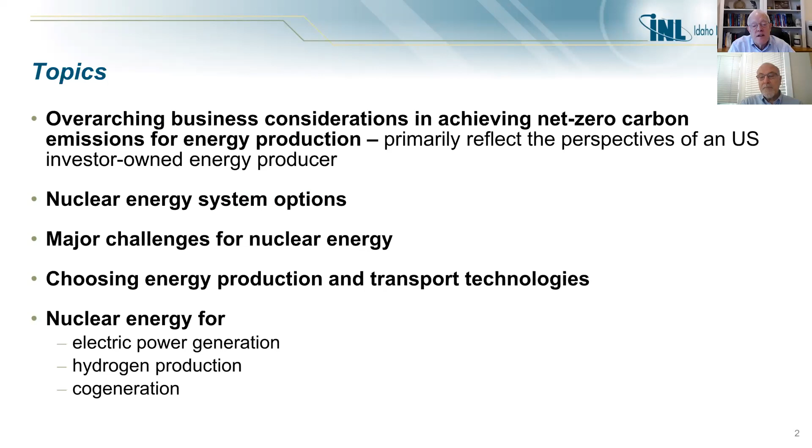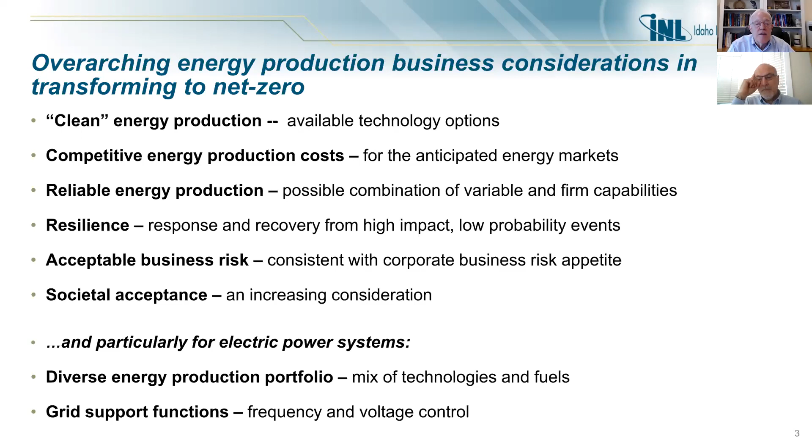Now, this is a list, and I won't read it to you. This is a list of some overarching energy production business considerations in transforming to net zero. I'll focus on a handful of these. One, looking at competitive energy production costs. Two, reliable energy production. How do we get to an acceptable business risk from the perspective of an energy producer? And then lastly, for electric power systems specifically, what are the thought processes in getting to a diverse energy production portfolio? This is clearly a discussion of not just nuclear energy, but what is the mix that makes sense? Next slide, please.

In terms of nuclear energy system options, fission reactors in particular, there's a broad array, more than you can shake a stick at, that currently exist out there in the industry. And they won't all survive. That's just part of the business of finally down selecting to what makes the most sense from a business standpoint.

And understand, I am approaching this from a business perspective, not from a technology perspective, because the companies, particularly investor-owned companies in the United States, look at technologies, hopefully to the extent they can on a level playing field, and make their decisions based on business decisions. Technology is not the driving thought process.

So what are the options? There are a broad range of options available. The existing large light water reactors and heavy water reactor designs in Canada that have been deployed. The evolutionary light water based small modular reactor concepts, which are being looked at very closely both in the United States and in Canada today. And some alternative reactor coolant, non-water-cooled small modular reactors, and some larger reactors as well.

Now, these evolutionary and non-LWR technologies are interesting. They're not all new thoughts. Many of these we've looked at over the years, as far back as the 50s. These are variations on the theme that were looked at in the past, with a great number of improvements associated with them. So, some characteristics that are important. One, there's a higher operating temperature available in most of these designs to support industrial process heat applications. Very important option as an alternative business application.

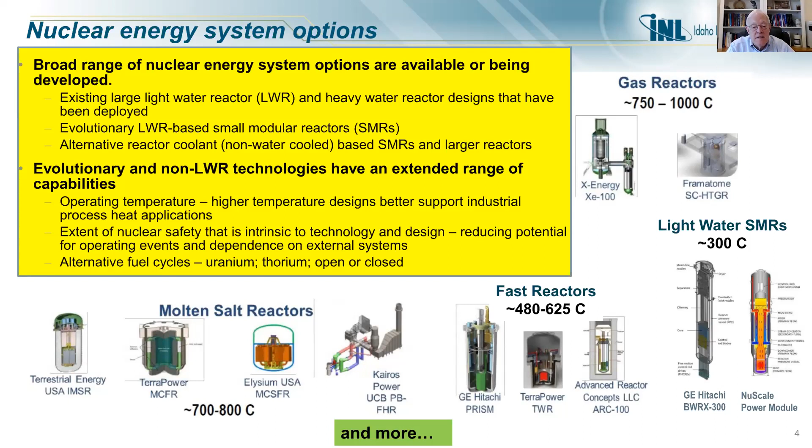Now, if I look at the United States, and I'll focus there because that's where most of my experience is, nuclear energy development in the United States today is very broadly based, not focused on bringing any particular concept to commercialization today. We're looking at multiple different options.

Our major US electric power producers are committed to decarbonization. These are the folks that have been the owner operators for nuclear energy systems in the past. But that is a work in progress. The role of nuclear energy is yet a work in progress. The planning is yet to be finished, if you will, or even hardly started in many cases. And what is the role of nuclear energy?

In major part, it's waiting on the policies of the United States government as to where we're going with our net zero carbon emissions policy. What is it going to be? What's going to be the structure that will be enshrined presumably in legislation in our Congress? And what's the timing for that? You may have seen in the public media that the current administration is pushing towards a 2035 date for achieving net zero in the electric power industry, whereas the power industry has been looking at 2050 in general.

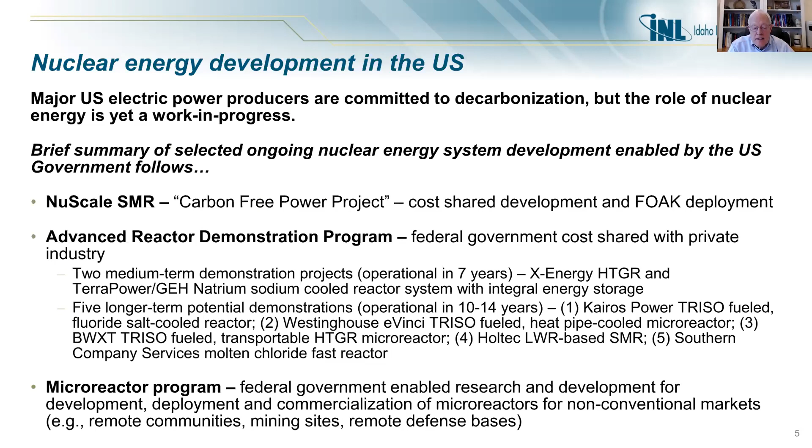Now, what are the major challenges for nuclear energy? One is, and probably the most difficult one right now, is demonstrated economic viability. We've had a number of false starts over the decades in terms of achieving economic viability of nuclear energy.

Our recent experience with the Plant Vogtle Units 3 and 4 in the state of Georgia got off to a bad start. It's an example of how not to build a nuclear plant. They began construction well before the design was done. And they've run into a number of problems over the life, and they'll finally be operational over the next couple of years, but a real challenge, and hence not a good demonstration of economic viability for a large so-called stick-built light water reactor.

Now, the small modular reactors have the potential for lesser capital investment due to factory modular construction compared to the economy of scale of the large light water reactors or other technologies. It doesn't have to be an LWR, but that's not yet demonstrated. And I hope we're able to show that that comes true. However, it's not demonstrated at the present moment.

Also, from a standpoint of economic viability, is the grid compatibility. The large LWRs require a large compatible grid. It's not something you'll put in a small isolated grid or in a remote location. SMRs, small modular reactors, can fit better in the smaller and variable size grids. Hence, there's an advantage, particularly when we're dealing with isolated grids or small grids.

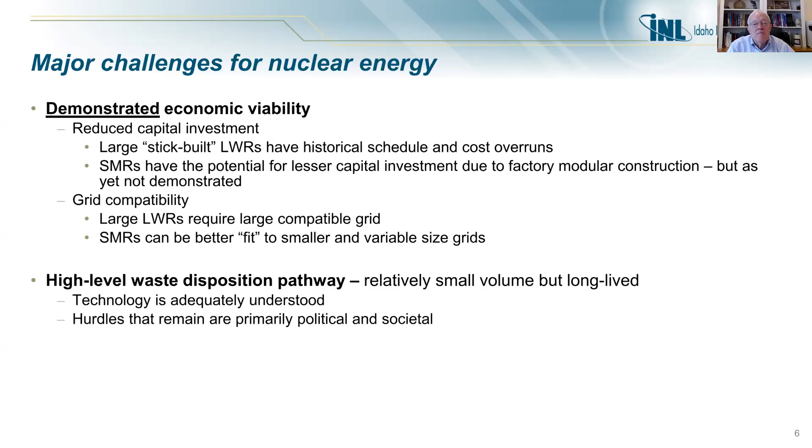Now let's talk a little bit about choosing energy production and transport technologies. And again, I'm doing this from a business perspective. I'm sitting back and saying, as I look at options, what's the best one that fits my business model and the approaches and the business lines that I have? So what's the expected energy utilization? Which lines of business do I want to be in? Historically, US utilities and power generating companies have been in the electric power business. That's what they do with nuclear energy.

However, there are opportunities opening in the areas of hydrogen production, the potential for process heat for industry, such as was mentioned by Sohail for the oil sands. And there's a hybrid energy production utilization where we look more broadly at the combination of electric power generation and process heat production in combination with a number of different off-takers and build a business model under the case of multiple off-takers.

So questions like, what is the proximity of energy production to where energy is used? As I'll discuss in a few moments about the oil sands, we're talking about kilometers between where the energy source may be and where it's utilized. How do we move it? How do we transport that energy? Electrical transport is one way to do it. However, that brings some inefficiency problems. Steam is another, molten salts. So how do we move it from where we generate or produce the energy to where we want to utilize it? A different question than we have faced in the past when it's been electric power generation as our sole business.

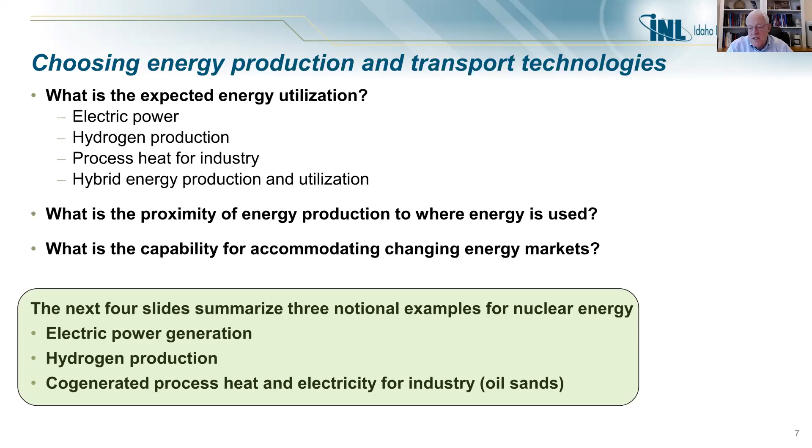So let's look at diverse production mixes for electric power generation. What's the optimal mix? There have been many regional and system level studies that are done. I mean, you can go to your bookshelf or online and find a large number of them. They all come to the same basic set of conclusions, that the optimal mix is a function of legacy and anticipated future resource options, no surprise.

A cost-effective, reliable, and decarbonized grid requires firm capacity, the old terminology, base load. There needs to be a considerable amount of firm capacity. A broad range of technologies, and I'm not speaking here just of nuclear, but a broad range of production technologies lowers the cost and business risk, and I'll discuss that in a moment.

Power producer considerations. Now I've gone from energy producer to power producer here because we're looking at electric power generation. The ones most often missing in these studies are the things listed there. How do we deal with stranded assets? What are the business lines of interest to the power producer? What's the corporate appetite for risk? And that's probably the one that overwhelms all the rest. How much risk are the power producers willing to take? Are they willing, as the expression I often use, to bet the farm?

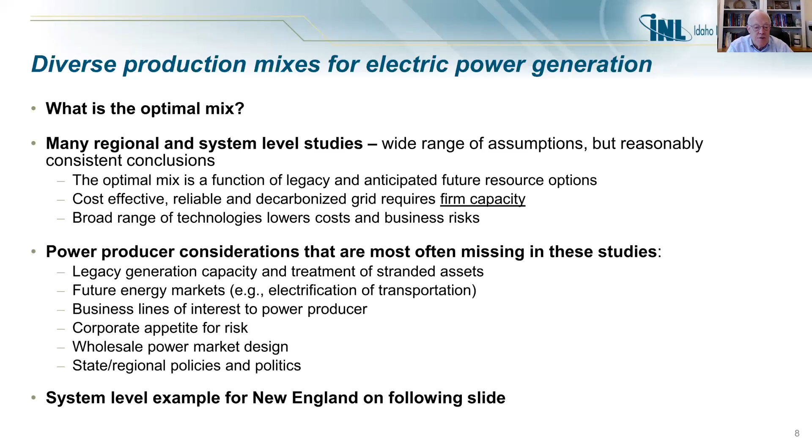On the next slide is an example for New England. This is out of a study done by MIT, the Future of Nuclear Energy in a Carbon Constrained World, and I offer that you may want to look at that directly. The figures may be difficult to see on these slides. But what's the bottom line? If you try to do it with singular technologies, or what is currently popular in New England, which is where I live, is, gee, we want to do it all with renewables, that drives the costs way up. The issue is there's a better balance.

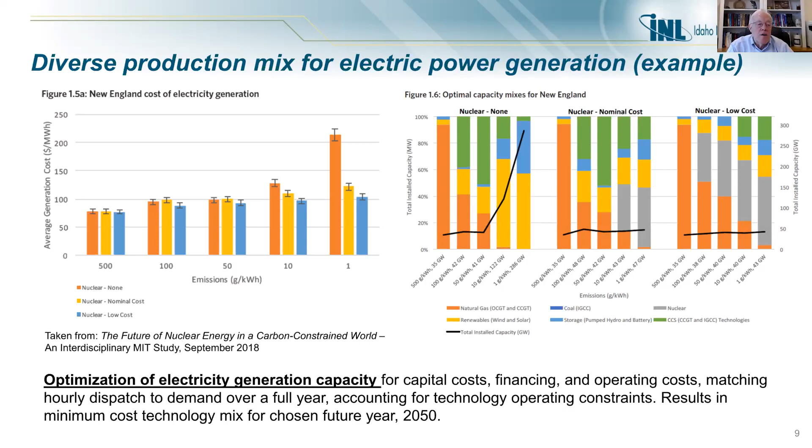What this study did was open the door and ask, what are the possible options as we decarbonize where we should combine different technologies for generation and production of energy? What seems to be the best mix? And what kept coming up, and this shows it for New England, but the same is true in Texas and other places the study looked, is that nuclear energy is a very important contributor to successful net zero emissions. As you increase your decarbonization, nuclear energy plays a larger and larger role to achieve best overall costs for production of energy. Next figure, please.

That business case won't carry you forward into the future, where you're having to build new infrastructure, in particular nuclear infrastructure, where over 70% of the initial capital investment and eventual production costs are that capital investment. I'll repeat that, over 70% of the production costs of a nuclear facility are tied up in the capital investment. So it's very important that we look for ways to get to higher efficiency nuclear produced hydrogen, for instance, high temperature steam electrolysis and some thermochemical cycles. Next slide, please.

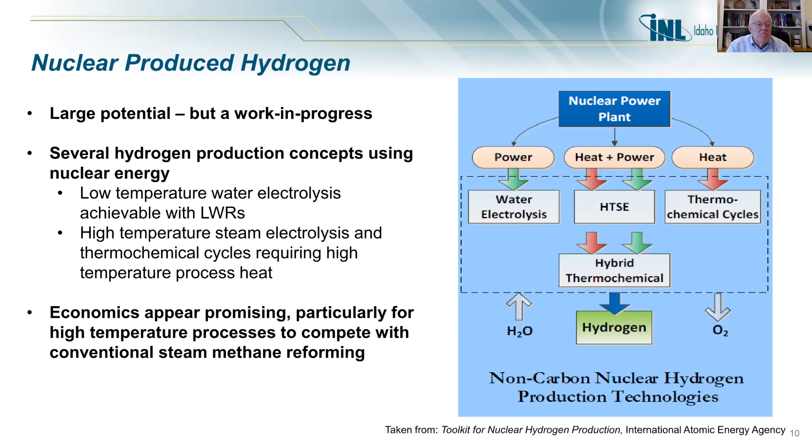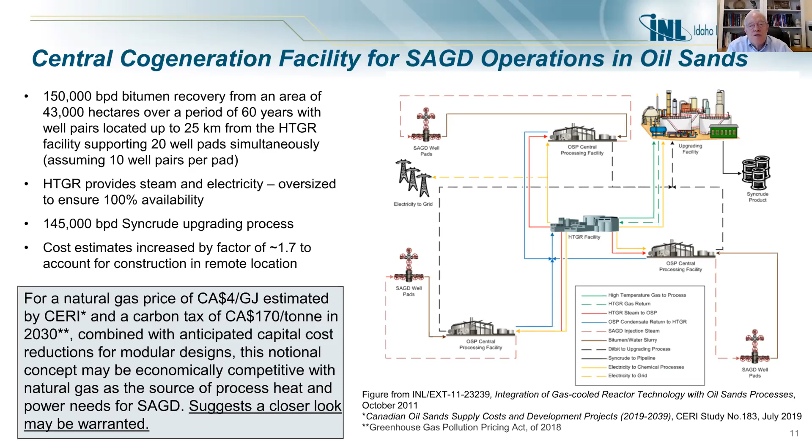And I'm suggesting here that Sohail and others may want to return to this discussion again with the projections for the carbon tax and what advantages we may get out of small modular reactor designs over time. That could say this might be an economic choice that we should look at very seriously again. Let me go to the conclusions, please. Next slide.

Nuclear energy does provide a compelling option for clean, economic, reliable energy production. And there are multiple potential applications that range from electric power generation to process heat production for industry. We have a lot of choices. Water-cooled and moderated reactor technology, some of which are applied in the small modular reactors, have extensive good operating experience, over 19,000 reactor years.

The accidents and events that have occurred are not technology oriented. They're a result of design flaws and misoperation. And those of you who may be interested in talking about that in more detail, I would suggest a separate conversation, because folks tend to assign what occurred to a particular technology, and it's not. It should be assigned to the specifics of the design, where the flaws were, and how they were misoperated.

Emerging evolutionary and advanced systems offer the potential for reduced capital investment. Very important. And better matching of production capacity to the application. And I underline this next point very strongly. All nuclear energy technologies will fulfill the acceptable yardstick for nuclear safety imposed by the regulators, or they won't be licensed.

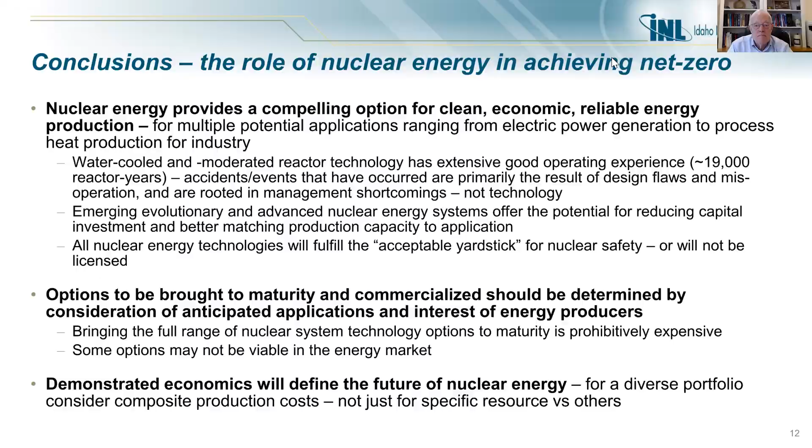Phil, that was an outstanding presentation, very thought-provoking and well-informed. So thank you very much. We appreciate that. The next presenter is Mr. Ali Siddiqui. Ali is the acting head of directorate for the Advanced Reactors Directorate at Canadian Nuclear Laboratories.

Ali has a range of management and leadership experience gained through roles including leading CNL's thermal hydraulic experiments and analysis group, corporate manager, supporting the executive team in the office of the CEO over the period spanning the AECL-CNL restructuring, and in program management roles with an essentially diverse range of research, including nuclear fuel and SMRs.

His current accountabilities as the acting head of directorate include leadership of over 150 scientists and technologists, management and oversight of a diverse set of advanced reactor related federal and commercial research projects, strategic planning, development of new S&T opportunities, and support for the SMR projects at CNL. So with that, please join me in welcoming Ali to make his presentation. Ali, you have the floor.

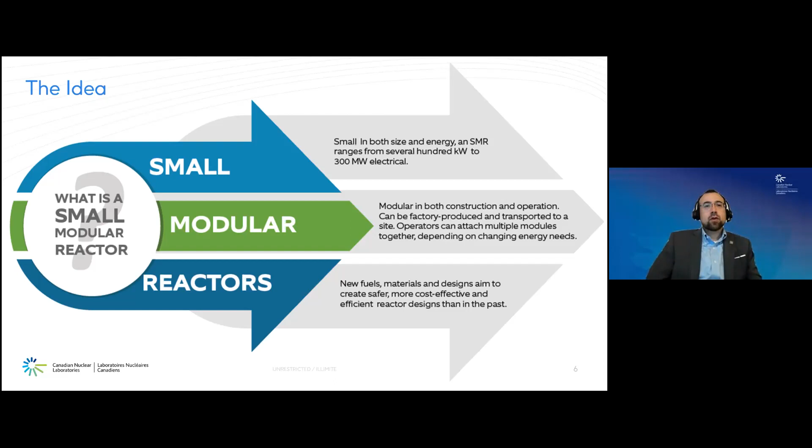SMRs really are an opportunity for Canada to decarbonize, and in particular, in areas which would be very difficult to decarbonize with other technologies. They really are the next great opportunity for Canada to reach net zero goals by 2050 and ensure economic growth and provide energy for all. Canada is in an excellent position with partners around the world to lead in SMR deployments. I would point to a couple of particular notable framework agreements or documents that came out in the last year, including Canada's climate change plan, Canada's hydrogen strategy, and Canada's SMR action plan, all of which lay out a future that includes nuclear and SMRs.

There are many markets for SMRs in Canada, and I'll talk a little bit more about that on the next slide, but certainly in sectors such as oil sands, in mining, in heavy industry, remote sites, and as a replacement for coal-fired generation, SMRs look quite promising. And they can be used to produce steam, process heat, electricity, and even be applied to produce hydrogen to use energy in the most efficient way possible.

I want to give you a little bit of a picture of the SMR landscape as it sits today. And I guess it's worth really highlighting here that in Canada, there really is a coordinated national effort. From a federal perspective, I've mentioned some of these framework documents, including the SMR action plan, where over 100 organizations have laid out something like 500 specific actions moving the SMR agenda forward. In the climate change plan, the Minister of Natural Resources specifically called out nuclear to help achieve 2050 zero emission goals by noting that there really is no credible climate change plan to reach 2050 targets that doesn't include nuclear. And I think that's really critical, and SMRs are an important part of that.

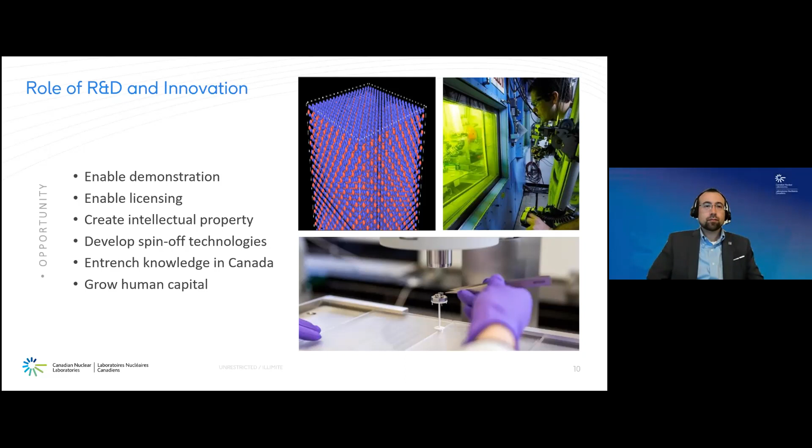We have several enabling components to help CNL achieve the vision that we've laid out to see SMRs come to fruition in Canada. Notable components here include our federal science and technology program, enabling us to build capabilities and support the federal family for science-informed regulation and to inform policymakers.

Canadian Nuclear Research Initiative, which is a cost-shared research program that enables SMR vendors to access CNL's capabilities in a collaborative approach. CEDIR Park, which is our clean energy demonstration, innovation, and research park. I'll talk more about that in a moment. And really critical is this SMR siting initiative that we have at CNL to see an SMR demonstrated on a CNL managed site by 2030. I'll give a few more comments on each of these before moving on.

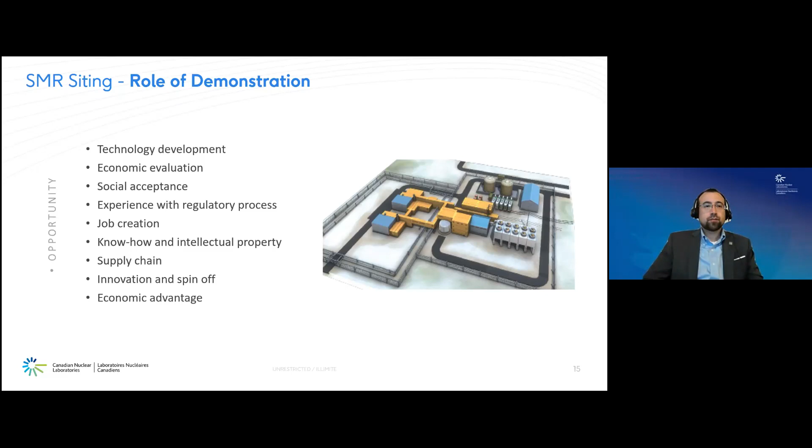CNL's demonstration timeline is moving forward quite rapidly. With the initial concept and a request for expressions of interest starting back in 2017, we launched an invitation process and first intake of applications in 2018. In this first intake, we received several applications. Throughout 2019, CNL furthered the development of potential sites and performed environmental baseline studies. We actually have multiple sites available at both our Chalk River Labs location and at a site that we have in Whiteshell, Manitoba, that may be suitable for SMRs to prove out their designs.

We have some first agreements in place, which is very exciting, which I'll talk about on the next slide, with one particular vendor that's moving forward rapidly within our process. And we're basically on the trajectory to demonstrate first power by 2030. So it's an exciting time.

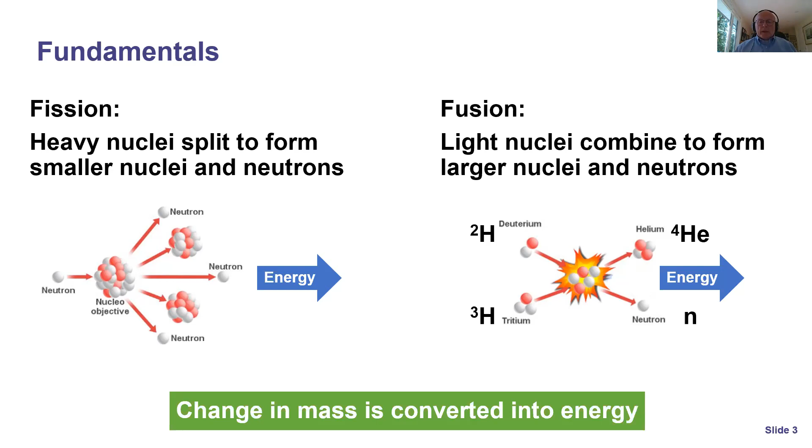An important point to note is that the products of nuclear fusion are not radioactive substances, although some radioactivity can be induced as a result of the neutrons being generated. But nuclear fusion has the inherent advantage of not creating long-lasting radioactive waste products. May I have the next slide, please?

And I think it's really important to recognize that fusion is a natural phenomenon. It's a phenomenon that powers the sun. It's the phenomenon that powers actually all of the stars, where nuclei are combined, mass is converted into energy, which is then manifesting itself in terms of electromagnetic radiation.

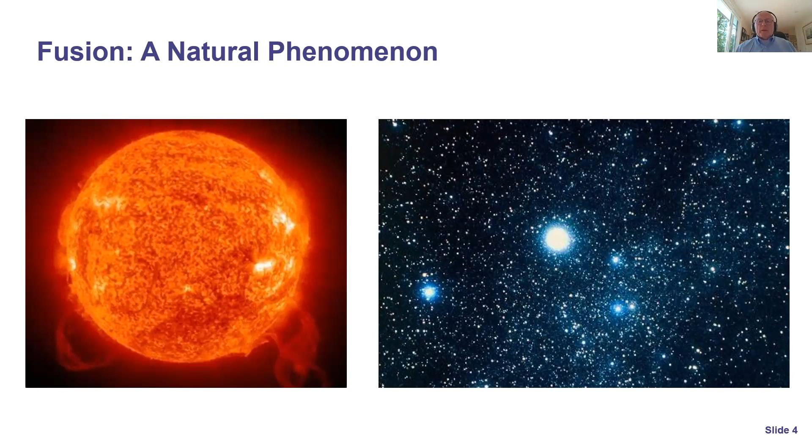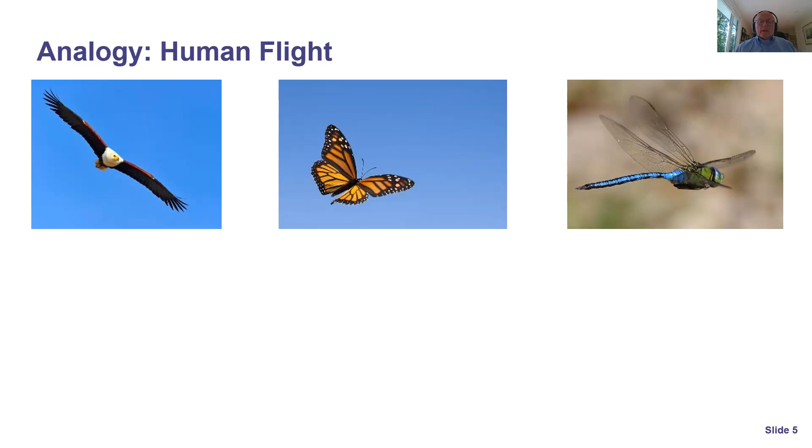But just because fusion is a natural phenomenon doesn't mean it is easily achieved under commercial conditions or for private use. So let me take a little diversion into an analogy. And the analogy is, in fact, human flight. Human beings have wanted to fly for a long time. They've known for a long time that flight is possible. After all, you can observe birds, butterflies, dragonflies. But that doesn't mean that it's easy for humans to fly.

If you click, since antiquity, there's the myth of Icarus who tried to fly by sticking feathers to his arms, and that didn't work. Leonardo da Vinci in the 1400s designed a flying machine with flapping wings, thereby emulating what birds do. Then there was an excursion into lighter than air flight, principally by the French in the 1700s.

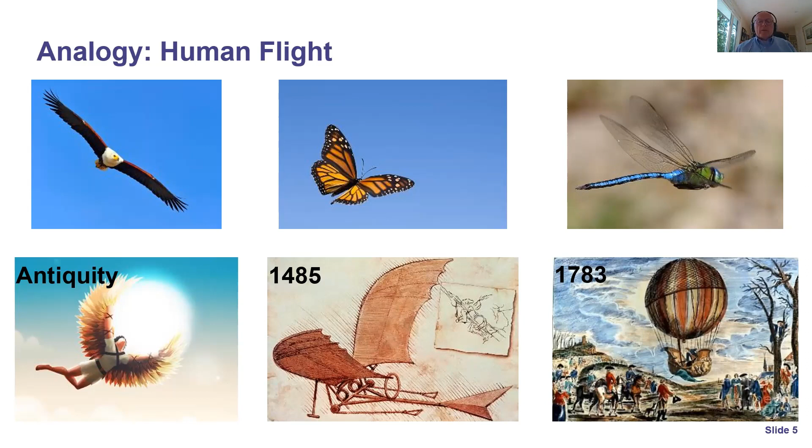But none of that really made human flight possible until the early parts of the last century, when the Wright brothers figured out that if you have the right combination of thrust that can produce lift, you can generate human flight. Their initial flight was extremely limited, no more than a few tens of meters, in fact.

But they recognized the importance of lift and thrust, and they recognized that you needed a power plant in order to generate the thrust, not by flapping wings, but by turning a propeller, having a power plant that was light enough and a fuel supply that carried enough energy in order to make flight possible. Well, you know what follows on from that, particularly during the two world wars, aircraft were developed to the point where we know them today.

If in 1903 you had asked the Wright brothers, is it going to be economically feasible to fly from the east coast of the United States to the west coast of the United States based on what they demonstrated in 1903, the answer would have been, the potential is there, but it's a long way between potential and reality.

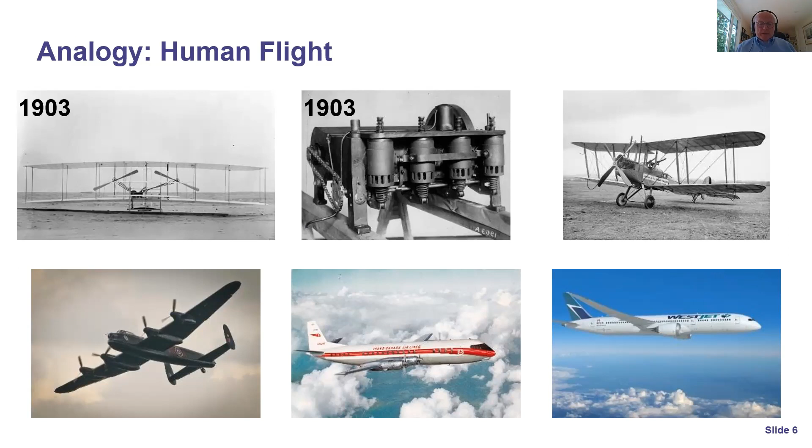So much for the analogy of human flight and fusion. Let's get back to fusion and what are the main approaches that are currently being used. The main approach that is receiving most of the attention is the combination of deuterium and tritium to form helium and a neutron. Now, deuterium exists in nature. It's part of water. We refer to it as heavy water. But tritium is not. So you actually have to produce tritium in order to make the fusion reaction work.

And you do this, or one way of doing this, is to take the neutron that's generated and you interact it with lithium, which makes more helium and tritium, which is what you're after. So the overall reaction is deuterium plus lithium forming helium plus energy.

Now, I know we have many members here today who are from the Society of Petroleum Engineers, and most of them do not think in terms of electron volts when it comes to energy, but they think in terms of other terms. So let me translate that. And let me translate it into a simple, but what I hope is a convincing way.

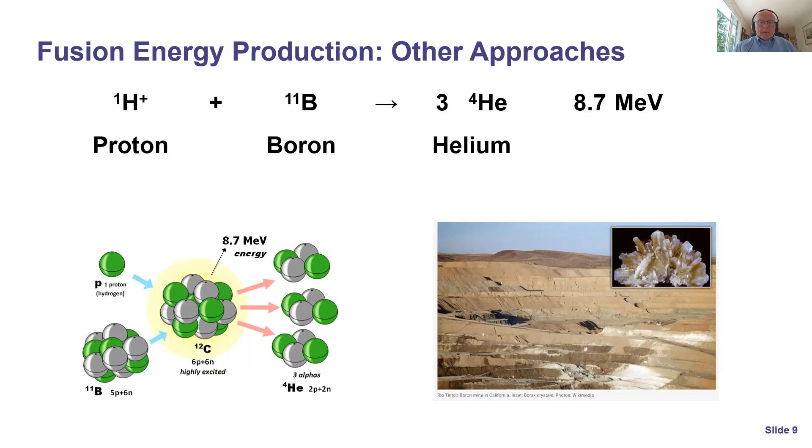But if you look at the energy that is yielded by this reaction, it's 8.7 million electron volts, as opposed to what I showed you on the previous slide. And on the left-hand side, you see the reactions of a proton with boron. It goes through carbon, and then it makes helium. And helium is an inert, non-radioactive product. So those are the fundamentals of fusion reactions. What are the challenges? May I have the next slide, please?

Well, there are some really big scientific and engineering challenges in fusion. And the reason is that nuclei, which are positively charged, are resisting their combination or their fusion due to Coulomb forces. Like electrical charges repel each other. So you have to find a way of overcoming that repulsion. So how is that done? How is it done in the sun, and how is it notionally done on Earth?

Well, you could do it by raising the temperature of the reagents to a very high level, like 100 million degrees Kelvin. And if you do that with deuterium and tritium, like any other reagent, it forms a plasma. That is, the electrons and the nuclei are no longer in close proximity, but they are separate. And at these high temperatures, they have a very high velocity.

And when particles have a very high velocity, and they are confined so that they don't escape from each other, and when they bump into each other, they can do this under conditions where the Coulomb forces are overcome. So you have to create very high temperatures of the level that occurs in the sun, and you have to confine your plasma for the nuclei to be able to collide or bump into each other. And when those conditions are right, then the nuclei can fuse, and we refer to it as a burning plasma.

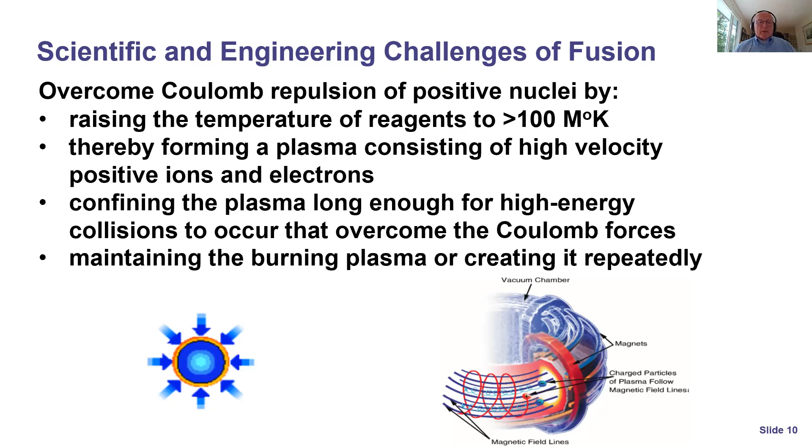So in the case of inertial confinement, you start out with a pellet, similar to a droplet in a diesel engine. And imagine that this little pellet, which may be a few millimeters in diameter, is irradiated by a large number of high power laser beams in every direction, in all three directions. If that happens, the high energy from the laser beams will cause the molecules that are on the surface of the pellet to heat up, evaporate, and by Newton's simple law of action and reaction, they will compress the remainder of the pellet.

And if it's done right, the compression will be such that the temperature will approach the 100 million degree range, and a burn will result, releasing heat, helium, and neutrons. And this very conceptually is the approach that's taken, if you can click on the next one then please, at the Lawrence Livermore National Laboratory, the NIF facility.

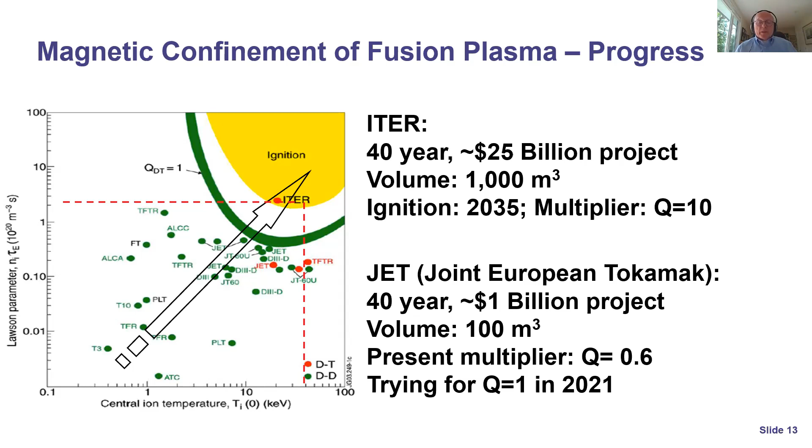One important one is the Joint European Tokamak, abbreviated as JET. It too is a 40-year project, but it's significantly smaller, both in volume and in cost. Its volume is smaller because it actually employs much more recent and more powerful magnets than what ITER was designed for. Now, it hasn't reached a multiplier of 1, which is what you need in order to break even simply on an energy basis. But an attempt is being made this year, and it's looking very promising that you will get to 1. May I have the next slide, please?

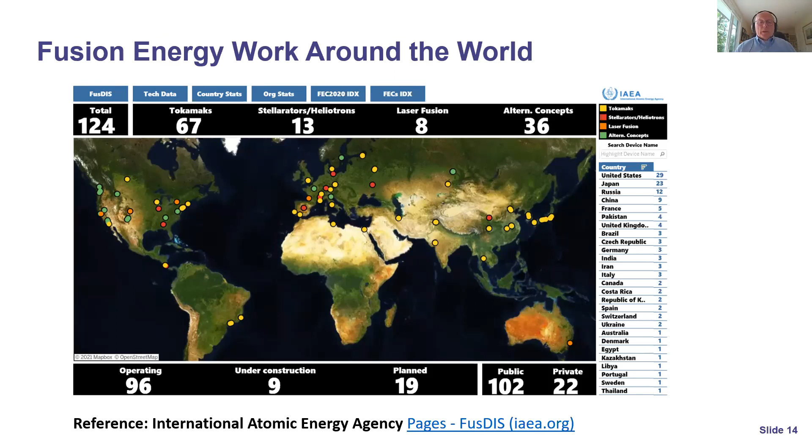This slide summarizes fusion energy work around the world at major facilities. There's over 100 sites where fusion energy is being pursued. I mentioned Lawrence Livermore before, as well as the ITER facility and the JET facility, which is located in the United Kingdom. So fusion is being pursued very actively, very seriously, and collaboratively around the world, in North America and Europe, and increasingly also in Asia. Canada has two main sites at present, and if I may have the next slide, please.

One of the sites is actually at General Fusion in Burnaby, Canada, which is using a combination of magnetic confinement and shock waves in order to bring about the compression. But other companies are also pursuing fusion. General Fusion is a privately held company, unlike ITER, which is a public initiative. So Commonwealth Fusion in the Boston area is a good example of a fusion-oriented company. There's a major one in the United Kingdom as well.

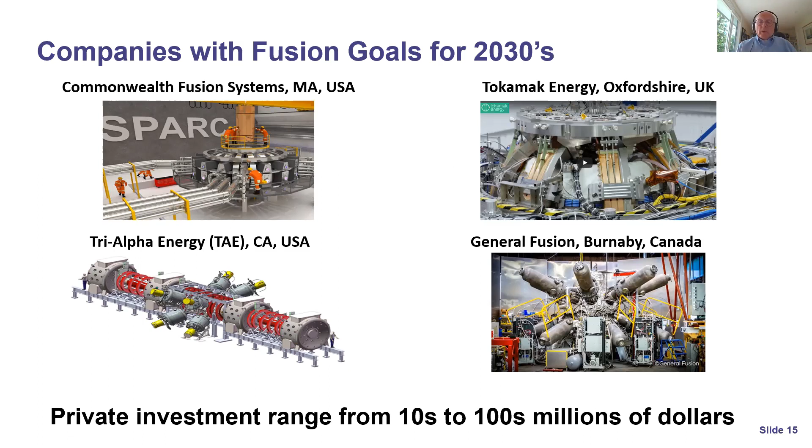And Tri-Alpha is interesting because it is pursuing the boron approach, not the deuterium-tritium approach. Private investment in fusion has ramped up very considerably. In total, it's estimated to approach about $1 billion of private money, which will, of course, be multiplied by public money in the years to come. So I hope this gives you a bit of an idea of what's happening right now. So if I go to the next slide, that foreshadows what will be happening.

And I take a cue from what our friends in the United States have been doing. In 2019, the National Academies of Sciences, Engineering, and Medicine released a major report on fusion. They called it Burning Plasma Research, which then led to the publication of their most recent report, titled Bringing Fusion to the US Grid, where they are looking at the creation of a first-of-a-kind fusion power plant.

And the idea is that this first-of-a-kind plant would be operational starting in the middle of the next decade, with an energy multiplier, of course, significantly bigger than 1. Not yet decided on what the electricity output should be, but it must be at least 50 megawatts electrical. And it should have an overnight construction cost of less than $5 or $6 billion and an operational life of 40 years. So this demonstration plant is meant to get the US to the point where fusion power can in fact be deployed to the grid and where insights can be obtained into the design, operation, economics, and all the other issues related to fusion power. So if I may have the next slide, please.